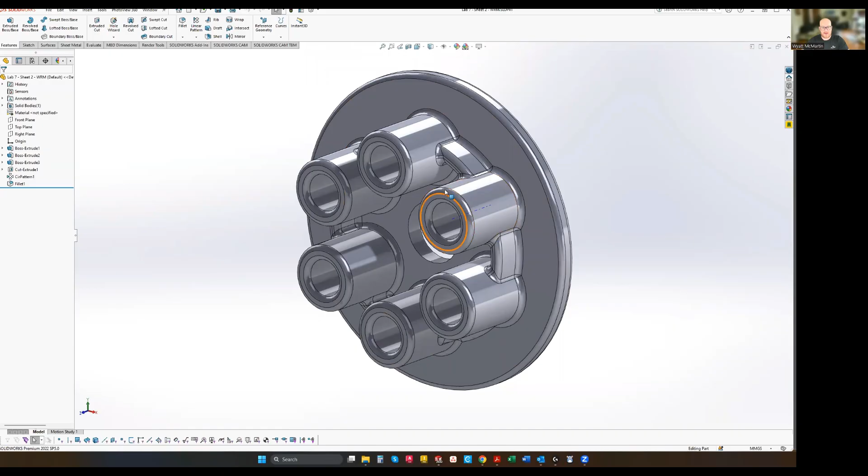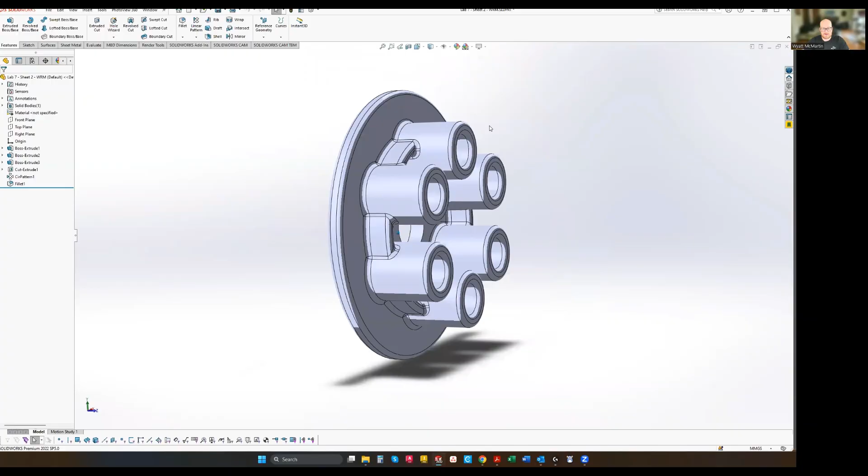This is what we're going to be creating, kind of this caliper type item here. I have this fancy RealView graphics on that makes it look a bit more like real metal, but you can turn that on and off with this button. There are actually a couple options, this gives you some perspective, you can make it look a little cartoony. And then there's ambient occlusion, which you can't really tell unless you have RealView graphics on, and when I turn that on and off it just changes how the light is rendered a little. I'm also going to turn off shadows and perspective.

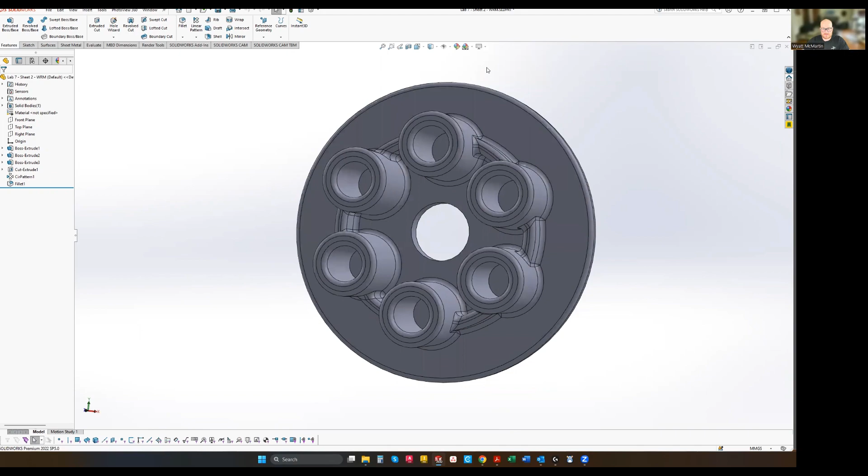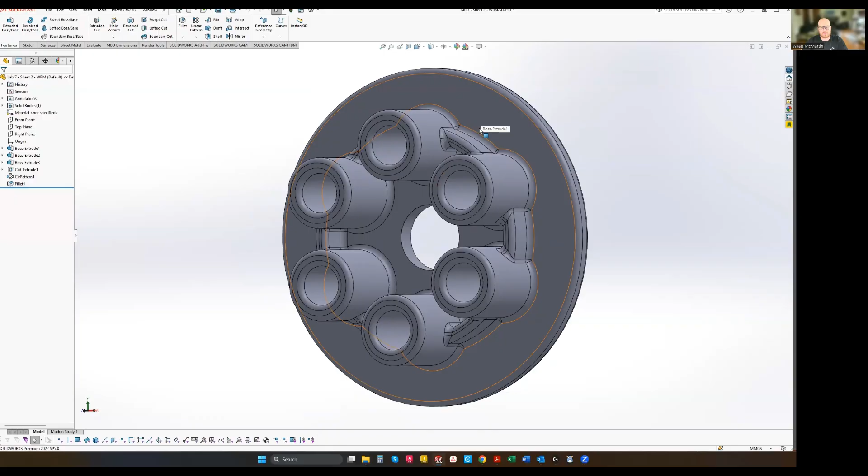So this is what we're going to be creating. A couple new tools here, nothing really for drawing the part itself other than we are going to use an array tool for the first time. But in the drawing, we're going to be using a number of new tools, and these tools are going to be important for Test 2, the first SolidWorks test coming up in a couple of weeks. Let me verify the actual date - Test 2 is going to be on the 25th of this month. So we've got a couple weeks, but remember, I'll remind you that the Lab 7 Sheet 2 lecture video uses a number of tools for the drawing that you're going to need for the second exam. With that, let's go ahead and get started.

First things first, you're going to come into SolidWorks, open up a new part file. The first thing we're going to do here is change the unit system to MMGS, we're going to use millimeters for this drawing, as we can see from your assignment. Then on the front plane, click on the front plane, we're going to do sketch.

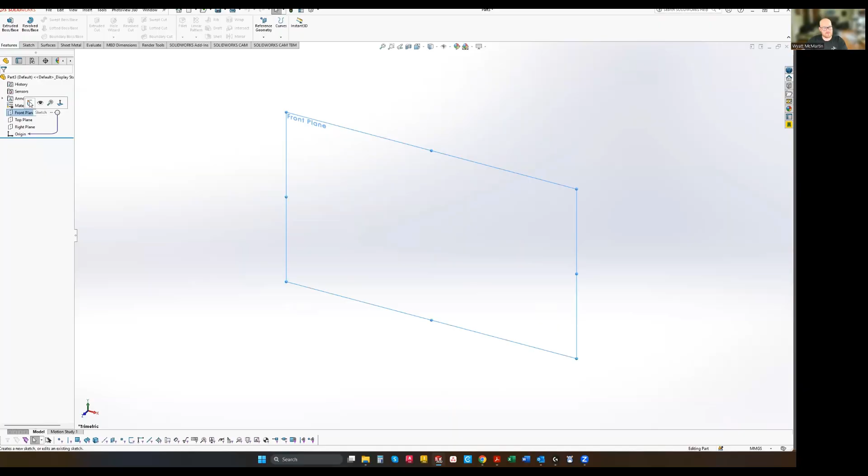I'm not going to show it quote this time, just so you can see what it's like to not have it being shown. Once you open up the sketch, it actually does automatically show it anyways, so it's not when you're actually drawing - when you have it selected, it will go away eventually, but the plane is there for you, so it's not like you're completely blind.

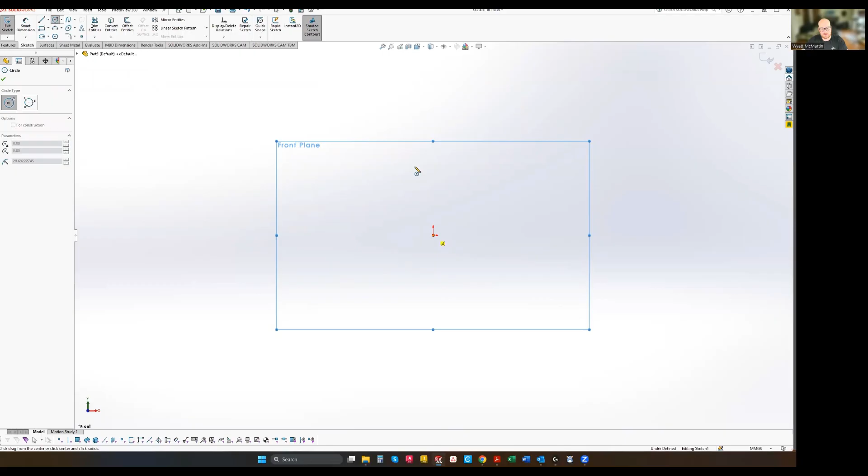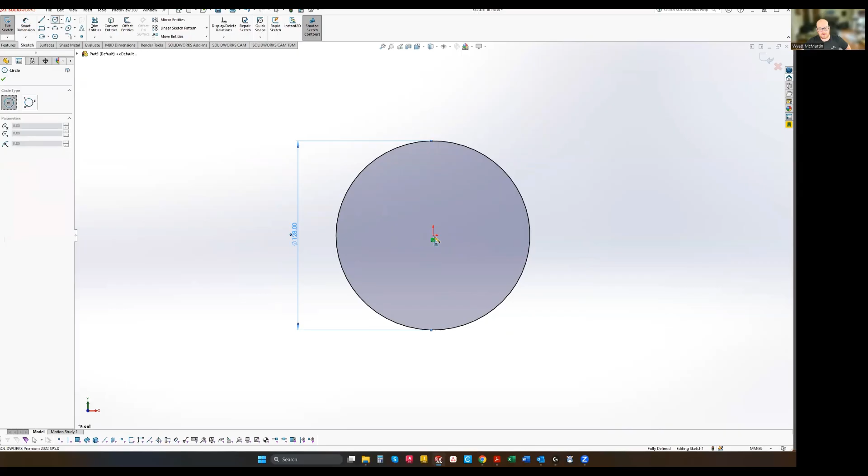Grab your circle tool and on the origin, go ahead and place that. Your plane may disappear, that's okay, and we have our circle. The dimension of that per our reference drawing is 128 millimeters. Then we can see in our reference drawing there's also a through hole right in the middle, and that through hole has a dimension of 25 millimeters. Once you have those dimensions in, you will see both dimensions are black, meaning our part is fully constrained, and we can go ahead and extrude.

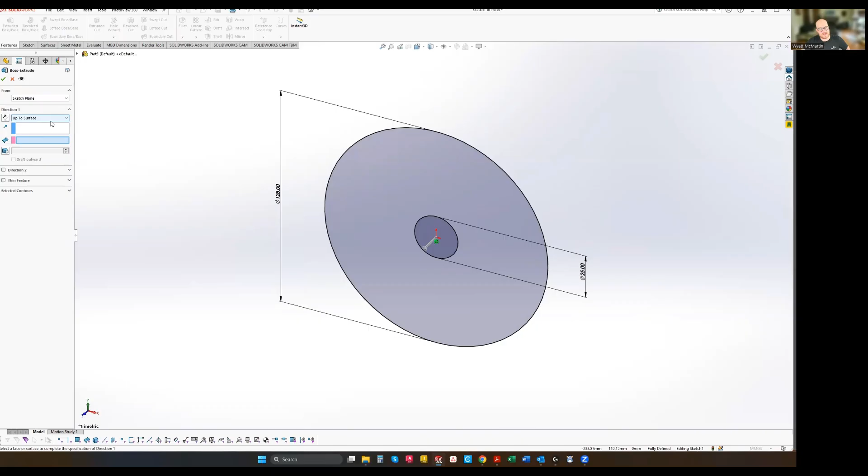For this, I am going to do my mid plane, even though the rest of the part's not going to be centered on the plane. But for this first one, I'm going to do it 7 millimeters from the mid plane. Click the green check mark.

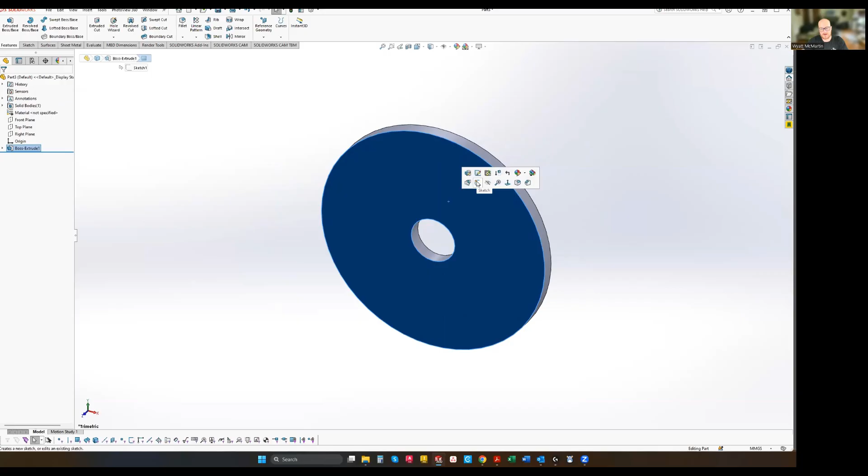Then we're going to open up a new sketch on this face. Click on this face, new sketch, and it's going to bring you normal to this face. I'm going to grab my circle tool, and starting on the origin, drag a circle out to this area here, and I'm going to dimension that out to 85 millimeter diameter.

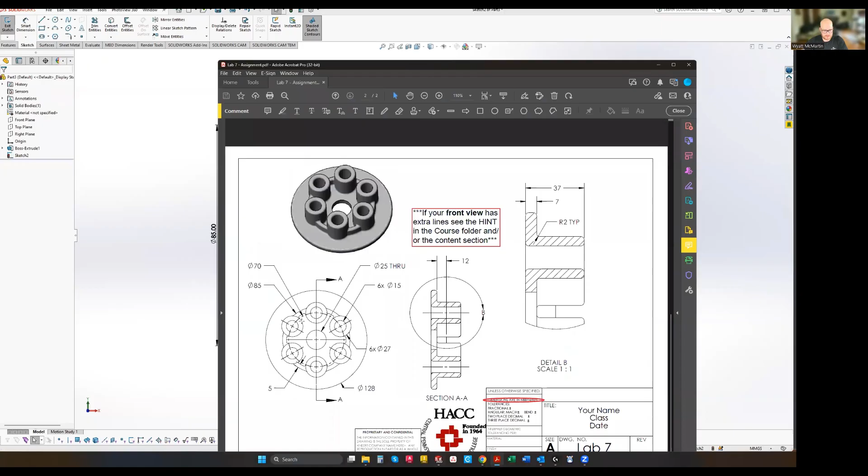Now what we're actually drawing here is this ring right here. So we don't have an arrow that's pointing to the inside of this ring. We don't really know the thickness—well, we have a thickness given to us here, but we don't have a diameter for the inside.

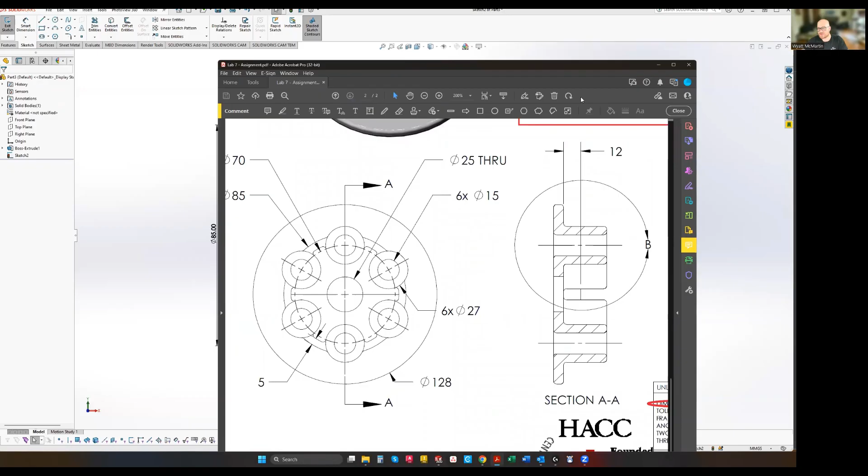So how we do that, just like in AutoCAD, SOLIDWORKS has an offset tool. So we can click on this circle, offset, and it's offset at 5 millimeters. But see, we're on the outside, so we're going to click reverse. That's going to bring our offset to the inside, green check mark.

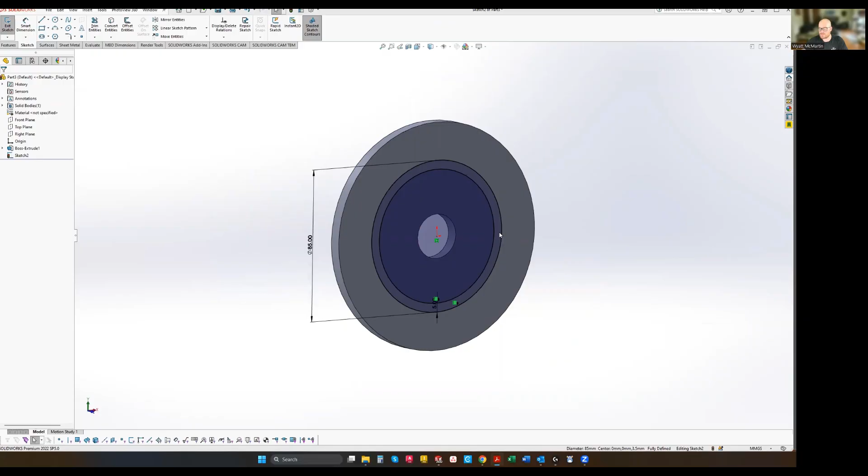And we can go ahead and extrude that. Let me zoom out so I can see my reference here off screen. And we're going to go ahead and extrude that.

Now this time, just like previously when we're drawing on a face, we already have material, we're just going to go blind. At least in this case we're going to go blind, and we are going to extrude that out 30 millimeters. Click the green check mark.

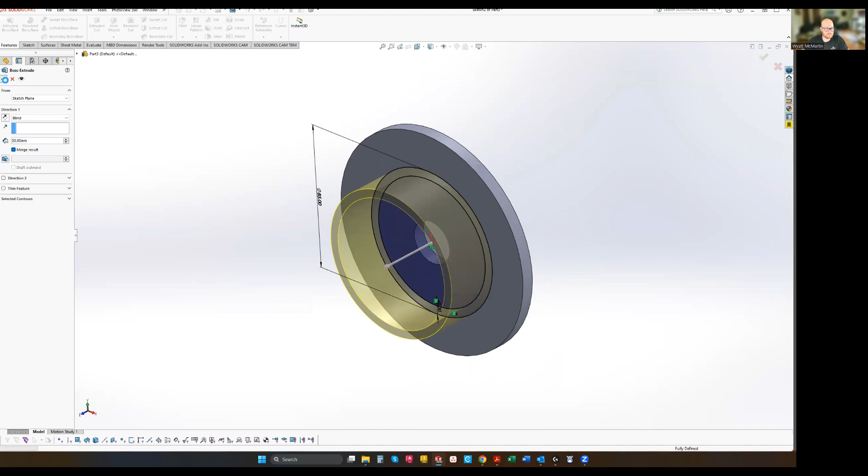And from here, Control-1 will bring you back to the front view. And again, let's go ahead and click on this face. This face and this face are both the same, they're just separated now by this rib. So either one of these is going to work just fine.

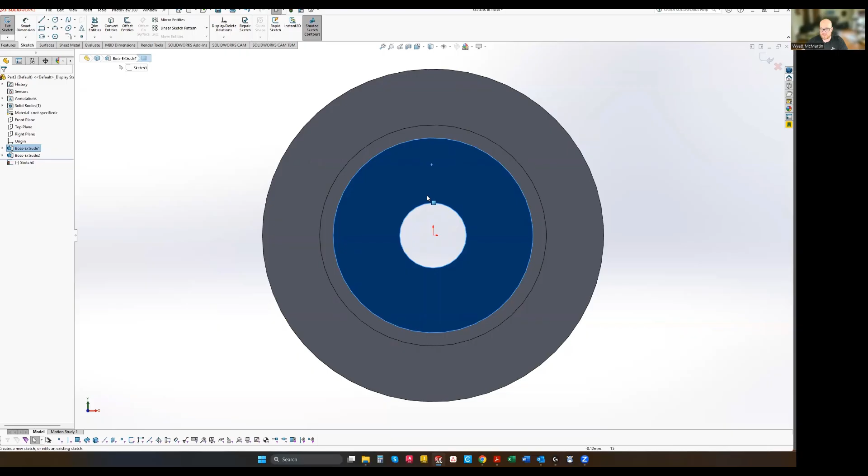Click Sketch. Now we're inside a sketch on this face, and we're going to grab another circle from the origin. Before we dimension it, let's go ahead and click on it, highlight it. Then in your properties window, go ahead and click that check mark, and now you'll see it is for construction.

Now go ahead and grab your smart dimension, and this per our reference is going to be 70 millimeters. And what that is, since it's for construction, it actually is in this case the center line for all of these little extrusions here.

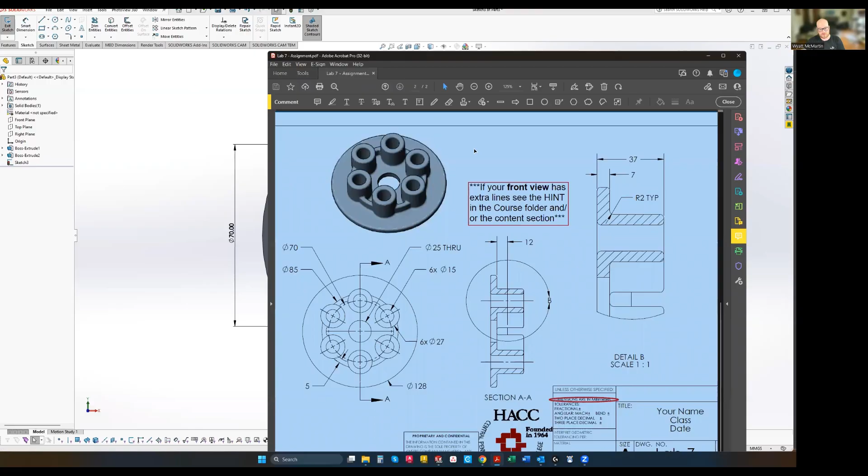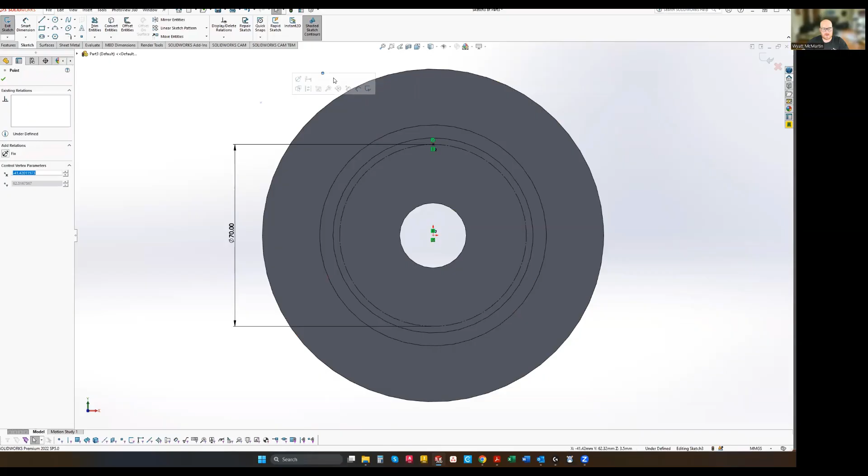So knowing that, let's take a point. You don't necessarily need a point, but I like to put one in, and you're just going to snap it right to the top of that circle, and it should automatically give a coincident mate and a vertical mate to this origin. So right now this point is vertical to the origin, which means it cannot move left or right, and it's also coincident to the top of this circle. So that point is fixed in space and it's black. If you just put one way out here, you'll see even a point can be blue or black—so this point is constrained.

And we're going to grab our circle tool, and we are going to dimension that circle as the larger, the outside circle. So that's going to be 27 millimeters, just like that. And now we can go to features, extrude, and that will also be 30 millimeters.

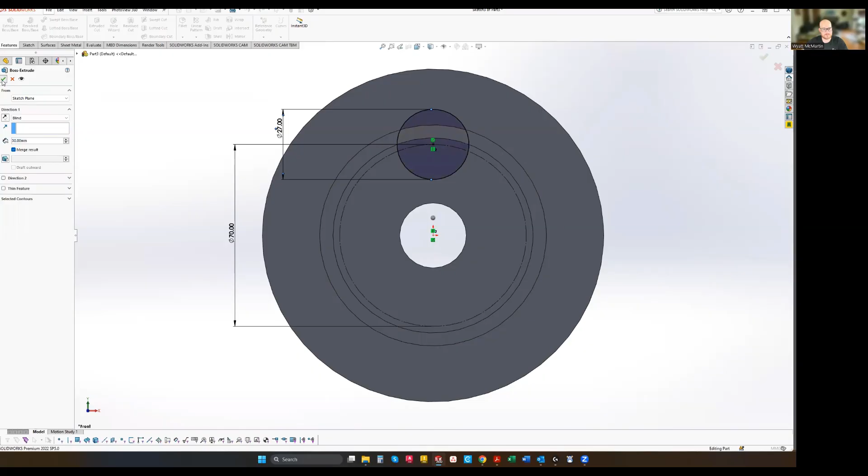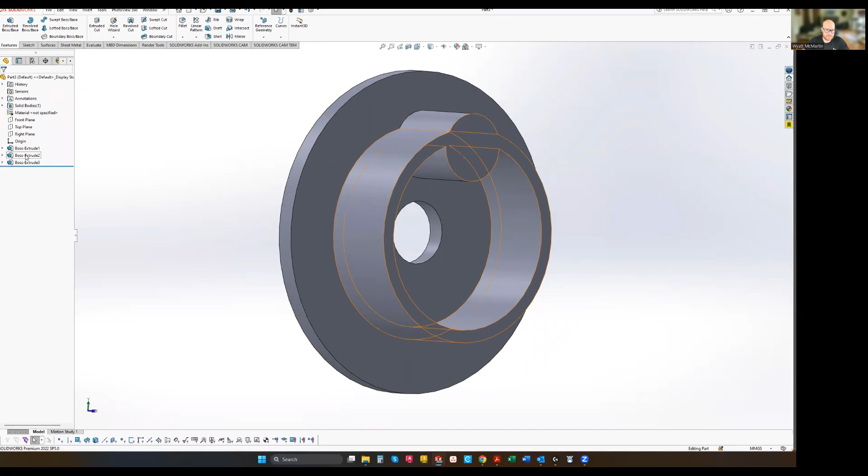However, there has been a mistake. This rib right here should actually, looking at our drawing, only be 12 millimeters tall from that top face there. So to fix that we have to edit our extrude. I can come back, click this extrude, edit that feature, and it's just as easy as changing this dimension that we put in. So we're going to make that 12, click the green check mark, and there we have it.

Next step here: open up a sketch on this top face right here. Good drafting practice—I would probably actually open this on this, but I kind of want to show you, you can draw really anywhere. You can't draw on a curved face, you'd have to project to that, which we're not going to cover in this class.

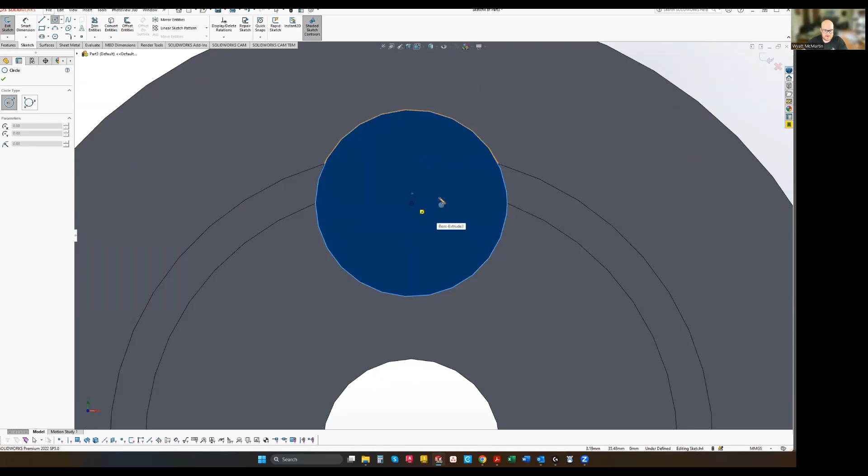However, we are able to draw on this face, so I'm going to go ahead and create a circle. Now if you hover over the edge it should allow—yep, there we go. You might have to kind of hover and then come towards the center, and it will give you an option to snap. See, there's that little yellow icon. So when that icon is active, that means you're going to snap to the middle.

And go ahead and dimension that to 15 per our PDF assignment reference drawing—15 millimeters. And we're going to take that, go to features, extrude cut.

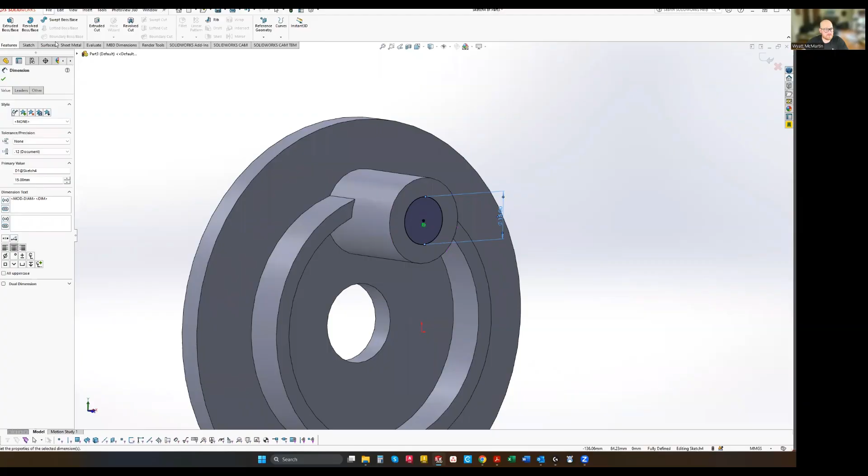Instead of going blind, we know the dimension, but we're going to use a different tool. So we're going to use Up To Surface. And then this face or this face would work because they're coplanar.

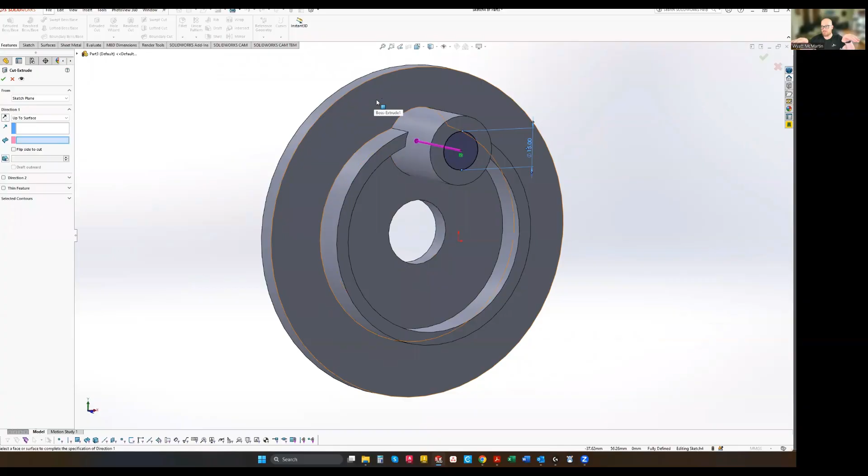That means they're on the same plane. We'll just go ahead and click here. We can see our preview is going to make that cut go right up so it's even with that face. Click OK. And there we have it. Now we've cut through our rib successfully.

Now we're going to use our array tool for the first time. Hold Control, click this Boss Extrude, then click this Cut Extrude. We'll come underneath linear pattern, do the drop down, and do a circular pattern. In AutoCAD, this would be a polar array.

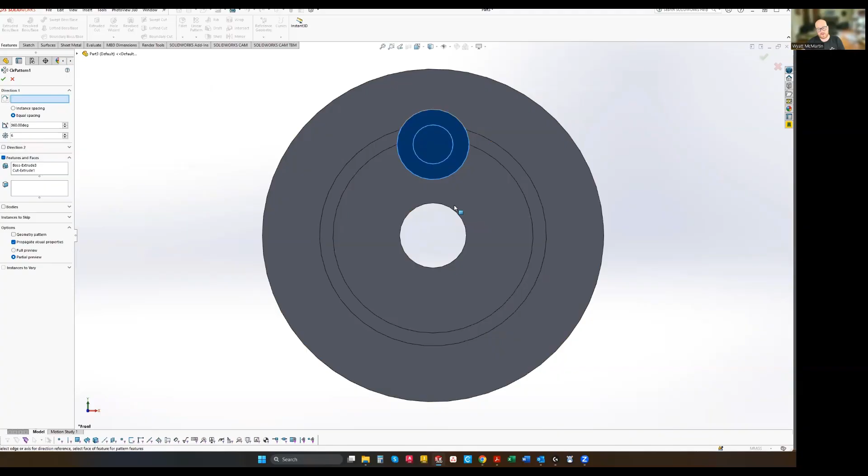Once we're in here, it's going to ask us the direction. We'll go ahead and click any of these arcs that follow this same point. This would work, this would work. I'm just going to go here like that. I already have 6. Yours may look like this, or it may look like something like this.

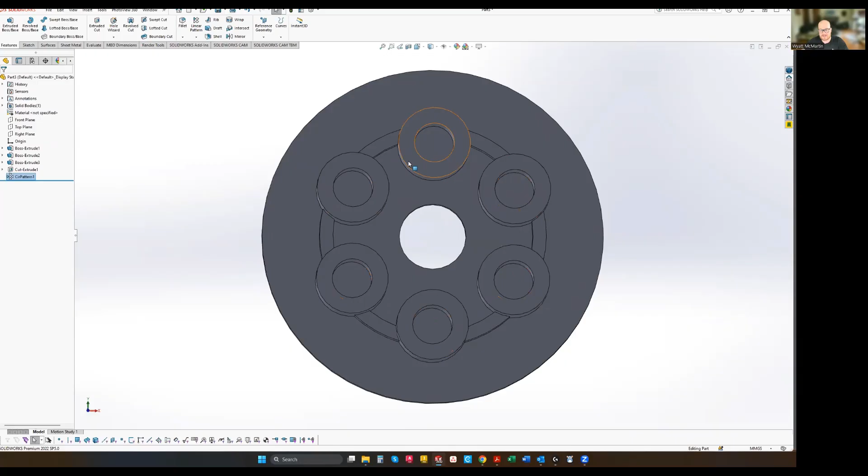Just change the number of instances to 6 and click the green check mark. You can see we have patterned the features. We didn't pattern a sketch, though you can also pattern the sketch, but we've patterned these features so that this rib has been cut every single place that this extrusion and cut occurs from our circular pattern.

We're almost done. At this point we just have to add some fillets. You can do multiple fillets if that makes more sense to you, or you can do what I'm about to do, and put them all in one feature. Sometimes it makes sense to split things out, sometimes it doesn't. For our purpose, I'll show you that you can have all of these fillets in the same feature.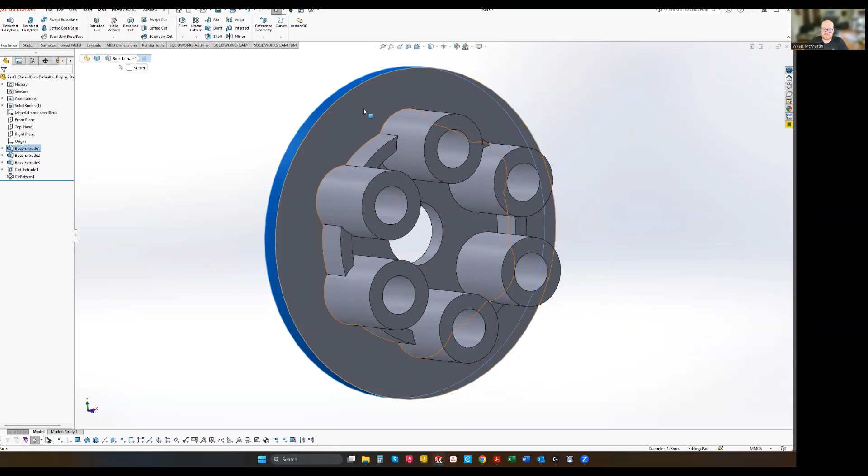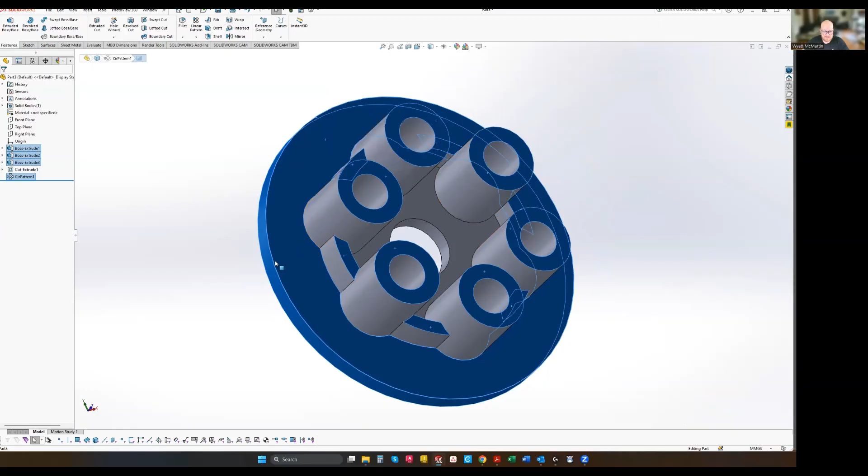I'm going to hold Control and select around. The tops of these all need to be selected. We want all of these filleted, but not either the top or bottom. See, I have this face selected, so all of this on the outside is going to get the fillet. And this face is selected, so the top and bottom here, but we're not selecting this face, because if we do, the bottom of this hole is going to have a fillet, and we don't want that.

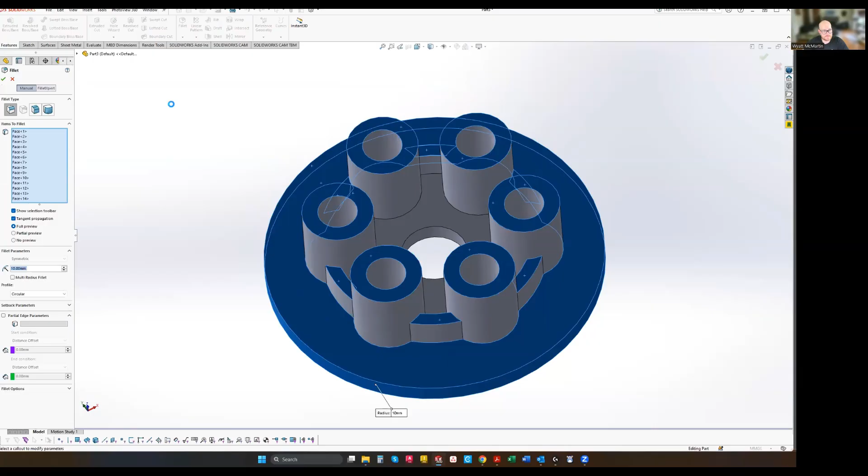From here, I'm going to go ahead and click fillet. The radius of that fillet is going to be 2. And now it's giving us a nice preview.

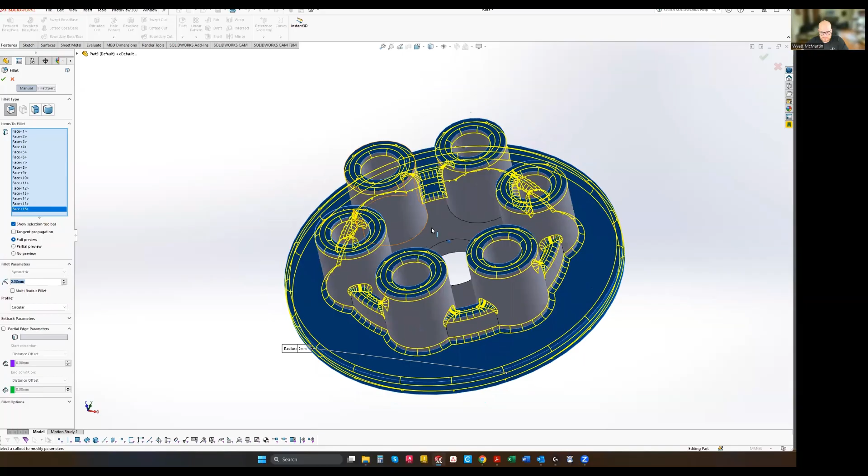We can see there's a few little items that are not selected that we want to be selected. I'm going to click that face, and I'm going to click that face. I know it does get a little dicey in here. Oh, and we want to select tangent propagation. There we go, just like that.

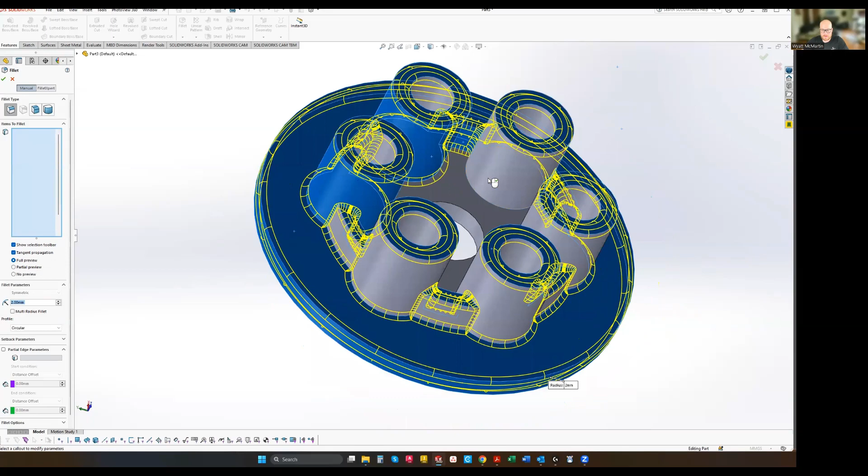Now we have almost everything done. To get the bottom of these pillars, I'm just going to select the pillar. There's different ways, you don't have to select exactly the way I'm selecting, but basically everything is getting this fillet, every single connection point on this entire model, except for the top and bottom here, but everything else is getting it.

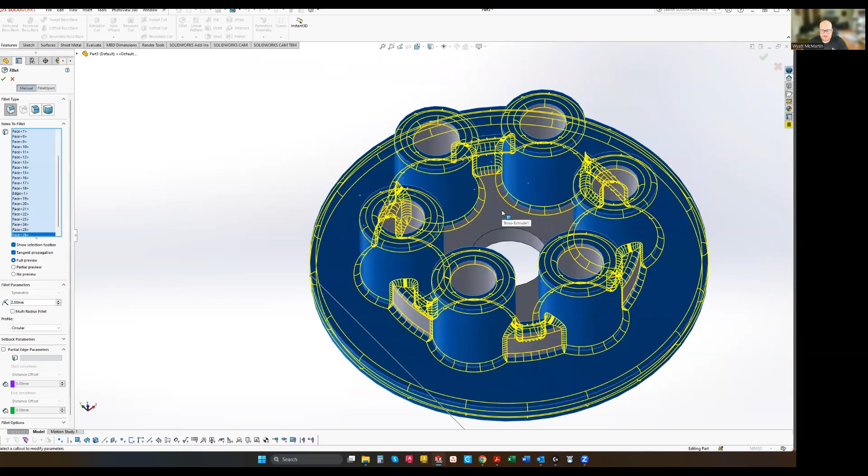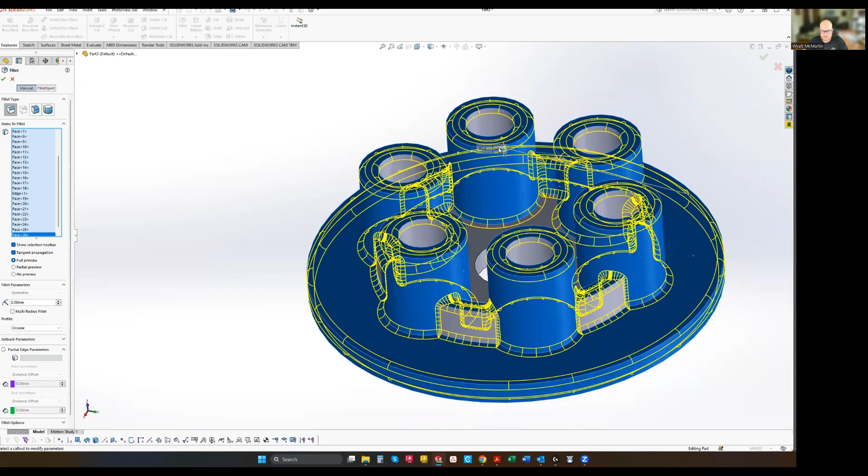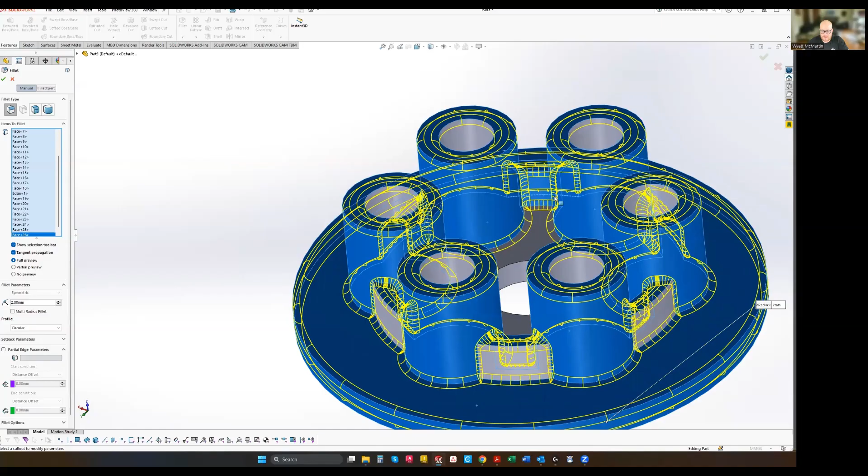I know this is hard to look at, but instead of looking directly at it, I kind of look with a 1,000-yard stare, looking in this direction, using my peripheral vision, not just at one individual line, but at this whole area. I can look through the preview and really see more. It's like seeing the forest through the trees. This one line would be a tree, but this whole preview is like a big forest, and I'm kind of looking at all of it at the same time by looking more through it than at it.

You can make sure that everything is selected. It looks like everything is, and we'll go ahead and click the green check mark.

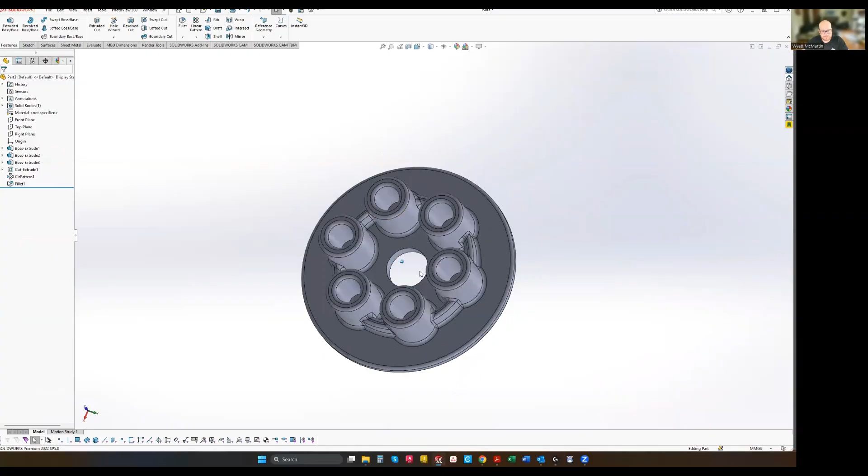There we go, so now everything has the fillet that needs to have it, and we only have one fillet feature in our feature tree here. The only things that don't have the fillet are this top and this bottom.

And with that, we have completed the modeling portion of Lab 7 Sheet 2.

So before we go ahead and plot this, give me a Control 1, which is going to bring you to the front view, and then click the up arrow 2 times. So Control 1, up arrow 1, 2, just like that, and then click the space bar to bring up the orientation menu.

And we're going to add a new view, a custom view to this, and it's going to make sense here. So we're going to click that. Our custom view is going to be called custom ISO, like a custom isometric view.

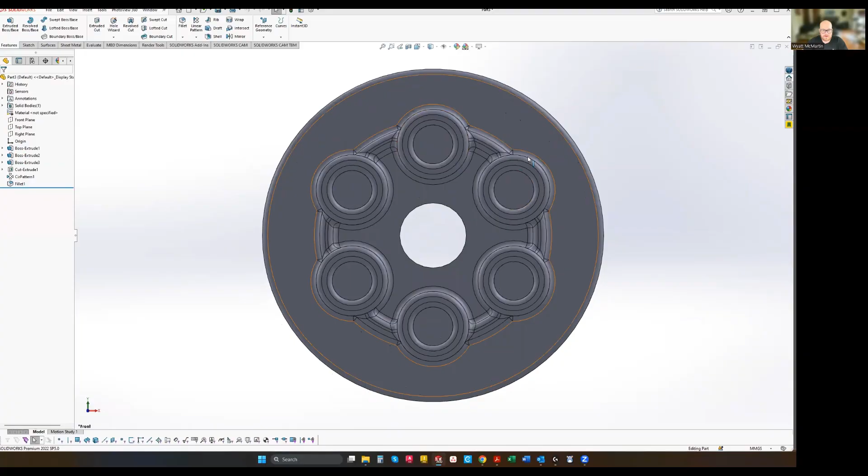There we go, so now we have it. So now we have our front view here. If I click the space bar to bring up this orientation menu, now I have my normal ISO here, but I also have my custom ISO. So I can just zoom to this view anytime. And this view will also be available to us in our drawing, which is why we did that.

So go ahead and save it. You should be saving it to your submissions folder. I'm going to go ahead and save it. Yes, I already have a drawing called this, I know.

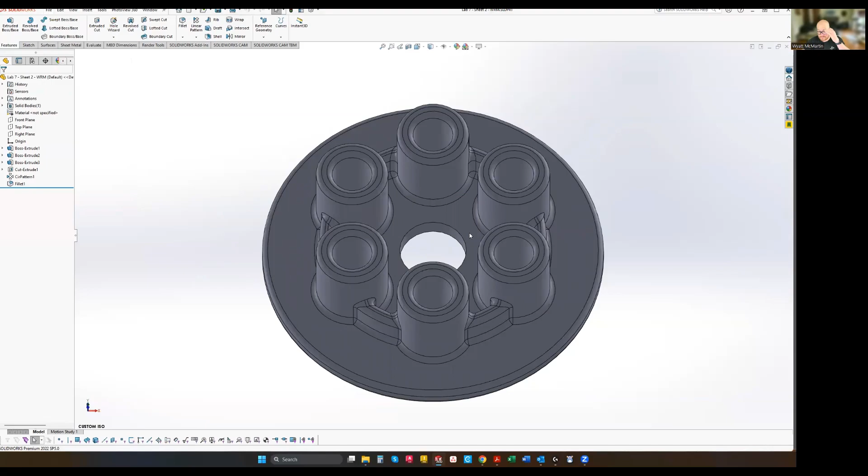Once this changes up here, you know it's been saved, and then we can file, make drawing from part. CAD 154 title block.

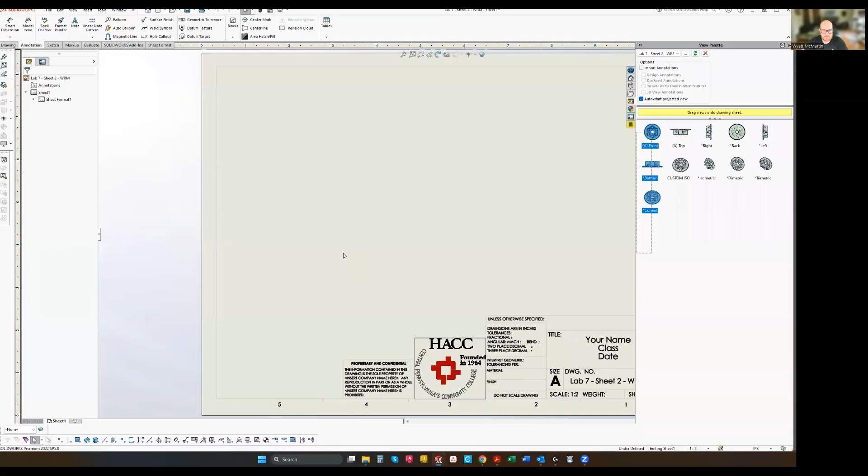And here we go, so let's click and drag in our front view. Oops, click on and then drag in, and place that kind of in this region, somewhere in here.

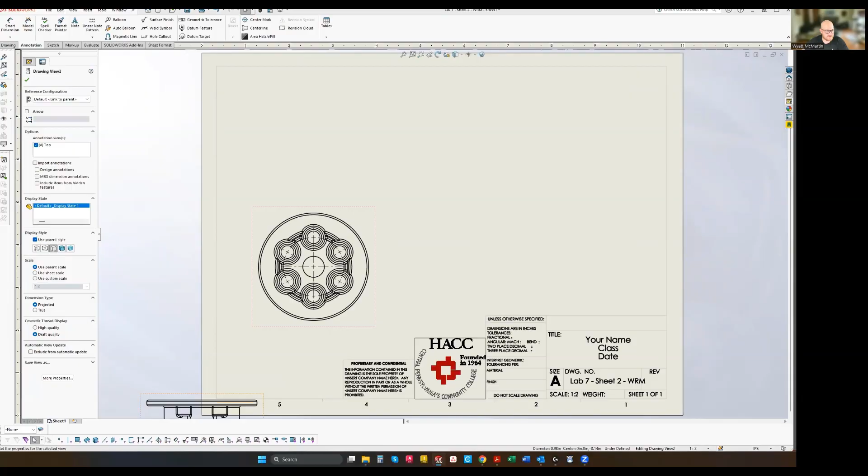Now you have all these extra lines. So what you can do is select the view, right click. Oops, sorry, gotta click escape, it's trying to give me projections. If you put one in on accident, just go ahead and click delete, click it and then delete it. So this is selected now.

I can right click, and under tangent edge, let's make tangent edges removed. So that was just showing us the exact point where it becomes tangent, and it's kind of distracting.

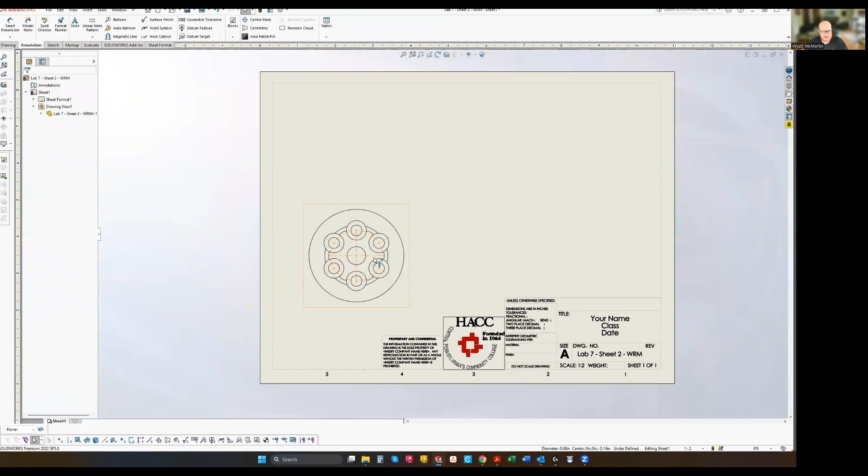So another thing that I want to show you how to get rid of is, oops, come on. There we go. You don't have to do this, but some people's might not come in with this nice center mark across everything.

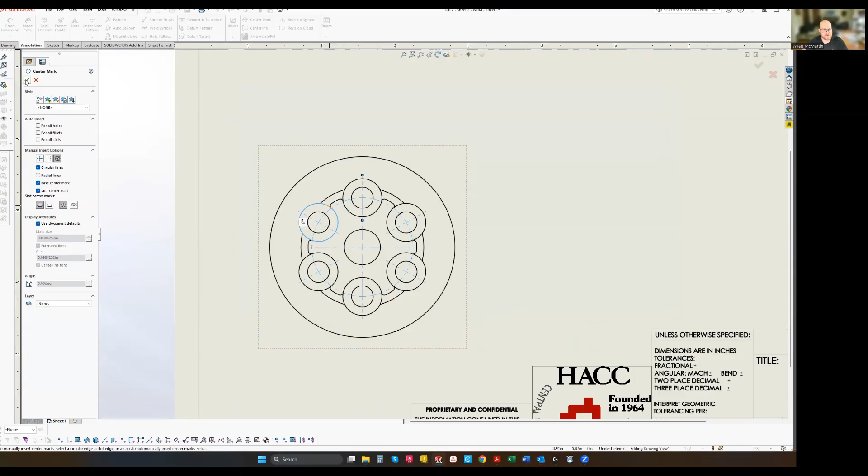So to get that back, or if you accidentally delete it, you can click center mark up here. That'll bring up this menu. And then you can select this circle, kind of like exactly what we have. It's called a circular center mark or radial center mark. And then you can come in and just click all of these, the outer circle, like the larger circle here. And there we go, that's how you get that back in case you don't have it or in case you delete it on accident.

Now from here, we will not be doing projected views. We are going to do, one is going to be the custom ISO. So let's go to drawing tab, model view,

and double click on your part, if that's open. I don't think I talked about that already yet, but when you go to insert these views, if you don't have the part open already, you're going to have to click the browse button. So when you do model view up here, if I already have the part open, it's just in this window, it's open documents. If you don't have it open, you're going to have to click browse, and then you browse to the location where you have your part, just like that.

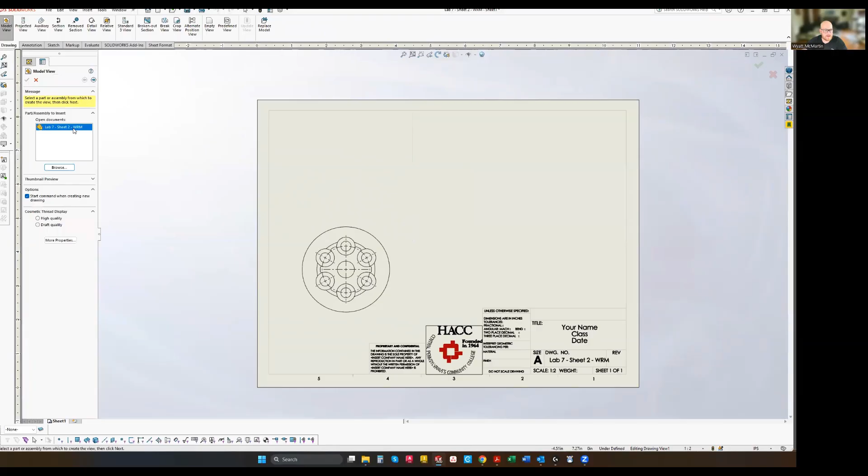So I have it open, so I can just go ahead and click. My custom ISO is an option, so I'm going to do that. There we go, drop that bad boy right in.

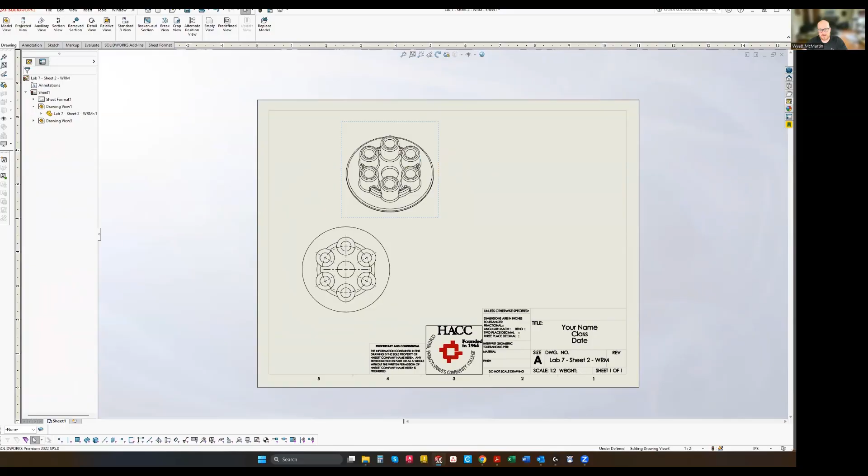Click escape so it's not trying to give you projected views. And then I'm going to click on that, and we're going to make that shaded without edges. And then this little button, this real view graphics, let's turn that on so it gives it a little bit more perspective, just like that.

Now we're going to do what's called a section cut, and we're also going to do a detail view. So the section view, this is what you're really going to need. These three things: the isometric view, the shaded isometric view, the section view, and the detail view are going to be important for exam 2.

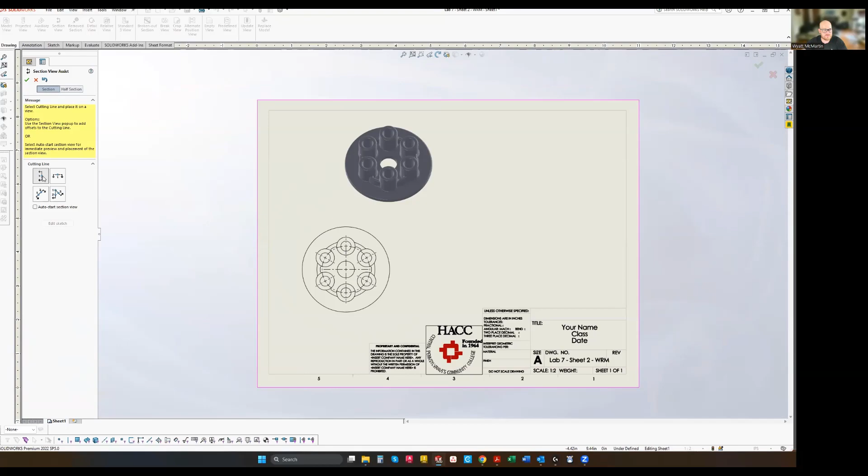So click on section view. We want a vertical cut. We're going to go ahead and click that location, click the green check mark, and then we can pull this out to the side here and go ahead and click to place.

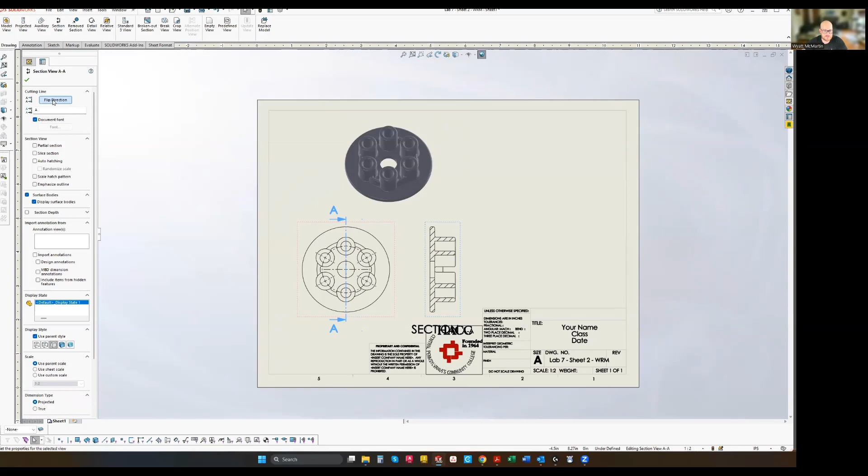I'm going to click escape a couple times. You may notice a couple things, the first being that this is facing the wrong direction. So go ahead and click on it. That will bring back up the section view indicator or menu here. Just click flip direction, and there you have it.

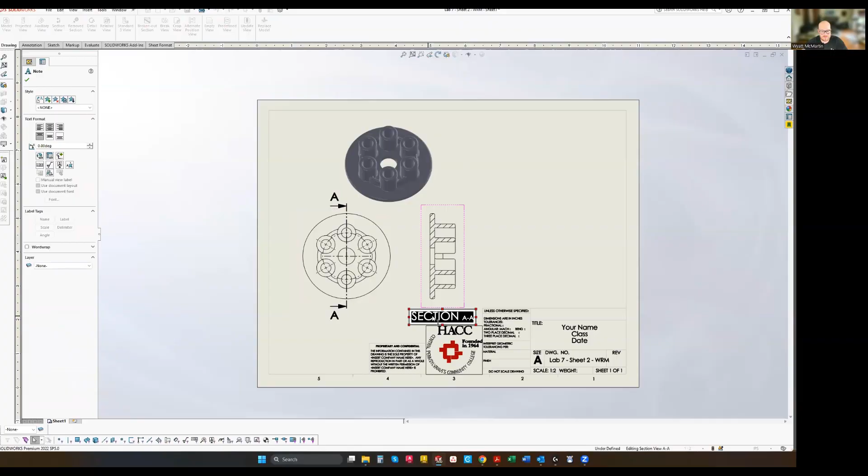Now we kind of want to bring this up a little bit because this text was overlapping our title block. It always comes in like this for some reason, so I double click to edit the text. It's all highlighted, and I'm just going to make it 12-point font, all of it, just like that. And I like to bring mine up just a little bit.

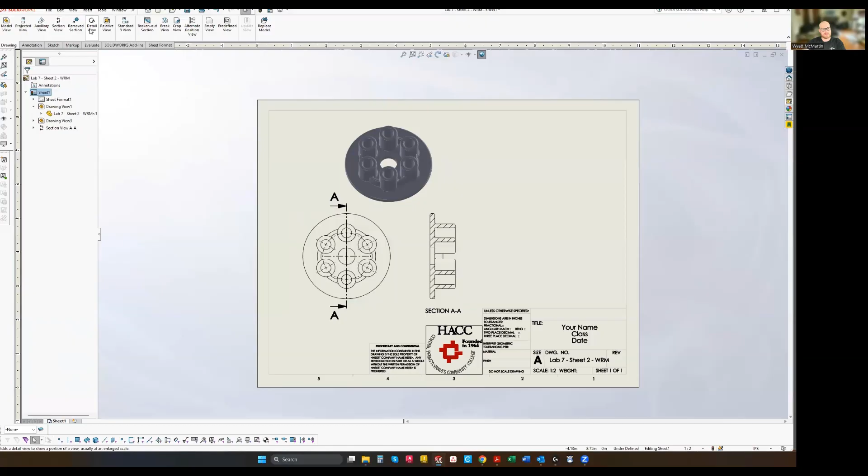Now, the next thing before we throw dimensions on, or the last view we need to put in, is a detail view. A detail view would be when you want to kind of blow something up to show more information than maybe you can get on there, maybe to throw some dimensions in like a really small little area.

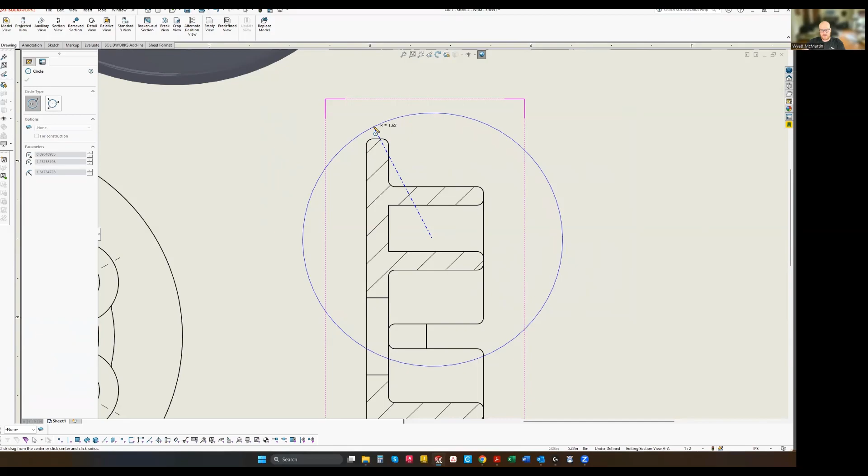So grab your detail view. It's gonna basically give you a circle tool. So I put my circle kind of arbitrarily, right in the middle, and I drag it up to this location. Click again, and now it gives you this really big view that we can place right over here.

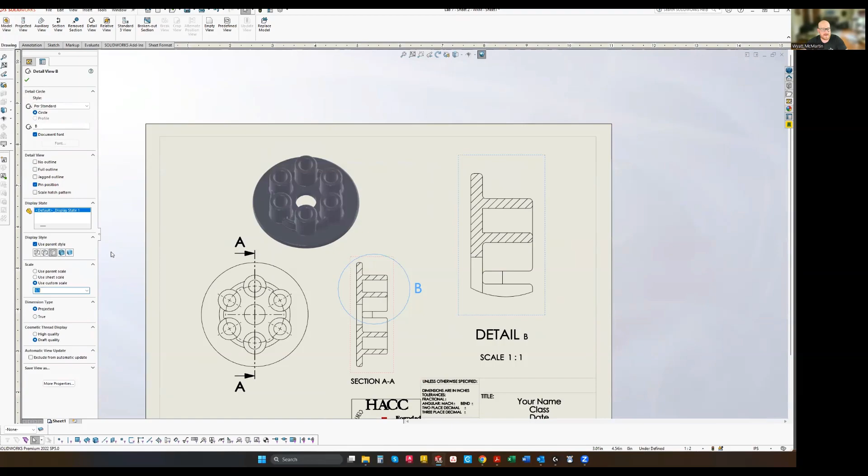You can change the scale of that, make it bigger or smaller. You do like a 1:5. You can do a 1:1. Or you can do a custom and make it really big. You can make it like 5:1, or anything you want. So 1:1 works fine here for us.

The rest of this is 1:2, and it should automatically just bring that in. It should choose your sheet scale based on the size of the model, generally speaking, that's why we haven't really talked about that. But anyways, go into double click the detail B, scale 1:1, and you're going to take this and just give this a 12-point font also.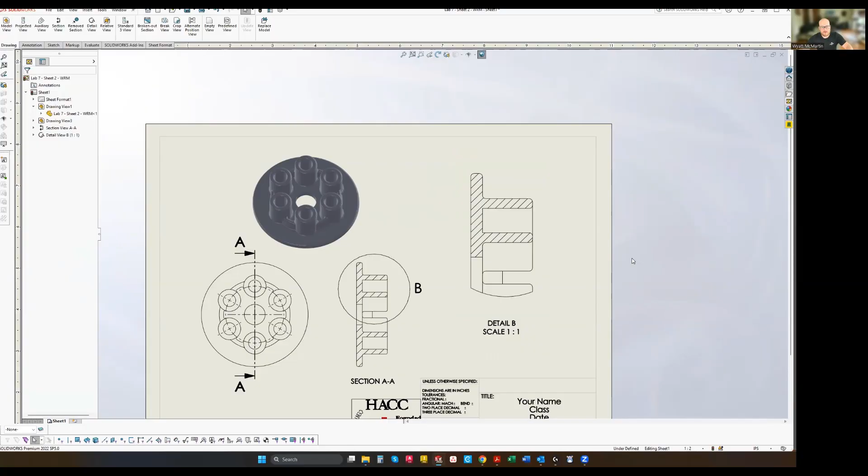And actually, I'm going to go back in there and delete that space. And there we go. So at this point, all we really have to do is throw dimensions on.

And we are going to have to change a few things in the little dimension scheme area. Double click the middle mouse will recenter. I know I've said that at least once, but I want to say it again. It works in the drawings too, it doesn't just work in the model. So we're going to come up to the options window.

And document properties, dimensions, primary precision, because we're in millimeters, is going to be none. We're going to need diameter dimensions, those are going to be broken leader horizontal text. Radius dimensions are going to be broken leader horizontal text.

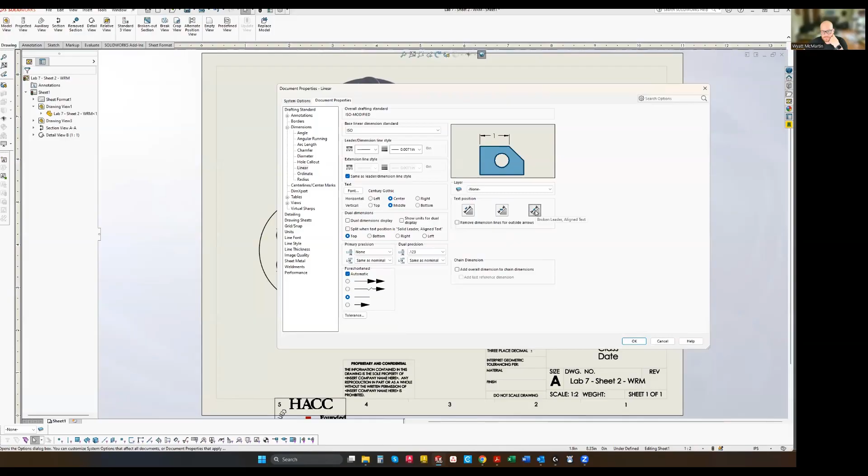And linears are going to be this guy too, that works. Or we can do that. How about that? Okay, and last thing here.

So we have, even though our part is in millimeters, we actually have to change this on our drawing too. So we're going to go change that to millimeters.

And from here, we could just throw some dimensions on. So I'm going to follow our sheet. So because this is like a broken circle here, because there's these cuts, it's going to show as a radius. So we're just going to take that and make it a diameter.

So you can click on it, you should be able to click on it or just right click on it. And you could display it as a diameter or display it as a radius. Another smart dimension, this guy. Just like that, same thing, make it a diameter.

There's that. And then we want to add some text, just like that over here in the dimension text area. We're going to add some text here too. This is going to be 6x space, and the x's can be small. I usually do small font for that kind of thing. And we need this guy.

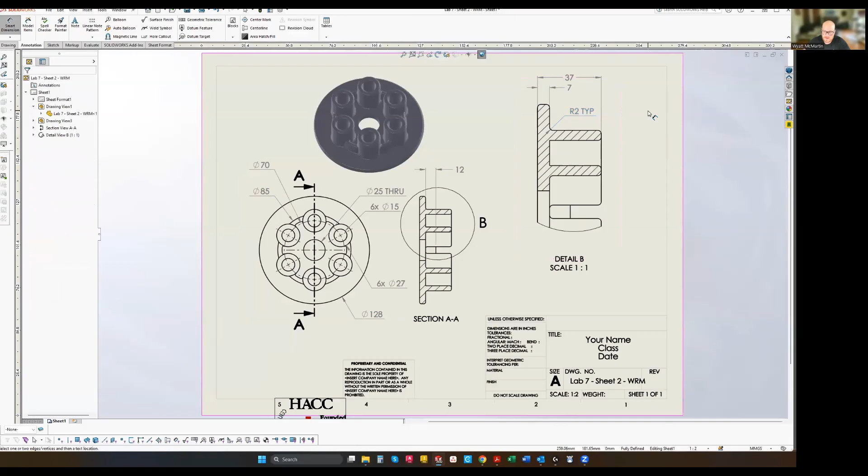And that looks good. So the only thing left we have to do is let's grab a center line. And we're going to go here and here. Oopsies. Added it to the wrong location. So I'm going to go here and here, just like that. There we go. And then delete that. Cool.

This added it for me on accident because I selected the wrong thing. So you will likely have to add both of them, but it's the same process. You just select the top and the bottom right here on both sides. And that'll give you a nice center line.

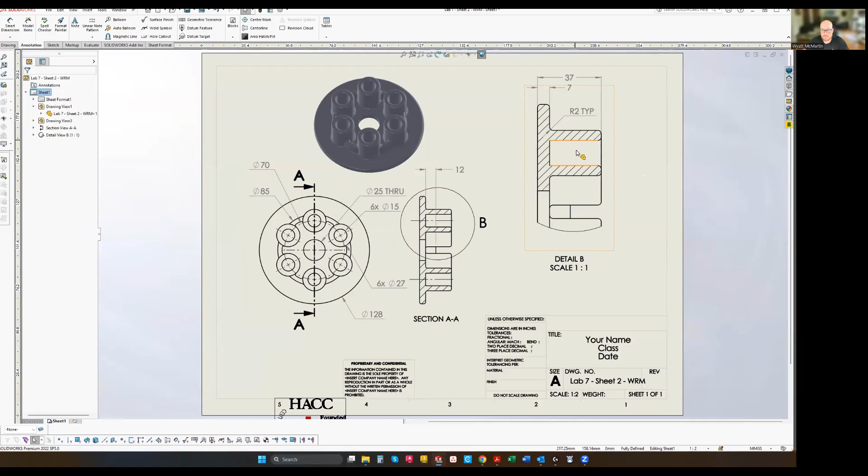And I just realized that I totally messed up our model. So let's go ahead and save this. It's going to be a quick change. I just want to save this drawing so that we don't get bitten later, you know, in case SOLIDWORKS crashes. And you should already have this part open, but if not, you can right click on any of these views and click open part.

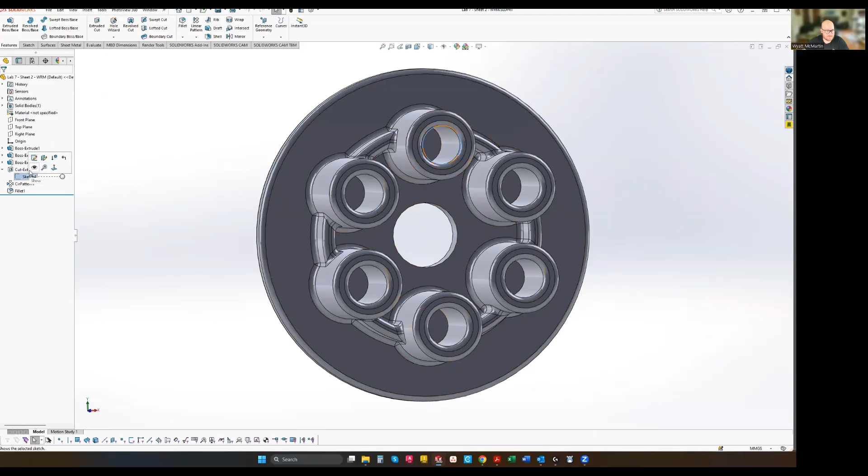Now, these were supposed to cut all the way through. So there should be, because these are bolt holes. So this cut right here, this is the cool thing about doing one cut and then doing an array or a pattern, is all we have to do is this face that we used. Let's just make that this face right there.

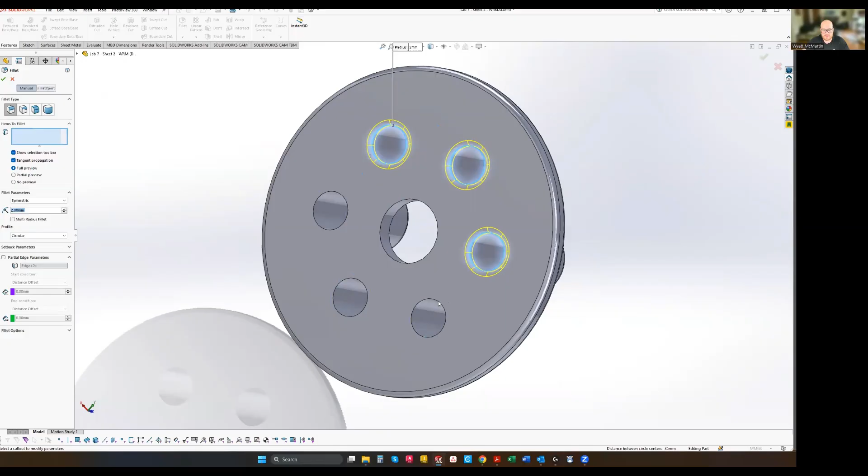Click OK. Boom. Now that mirror is all the way through. And then you can either edit the fillet that we already have, but for simplicity's sake, I'm just going to go ahead and make a new fillet. So I'm going to open up my fillet tool. And then with that open, just come through and I can click just like that. Click the green check mark. And there we go.

So I'm going to close this. You don't have to. You can just go back to your drawing. So I'm just going to close the part. You don't need it anymore. And now we are all the way updated. So the only thing, because we changed this feature, now this dimension is kind of screwed up.

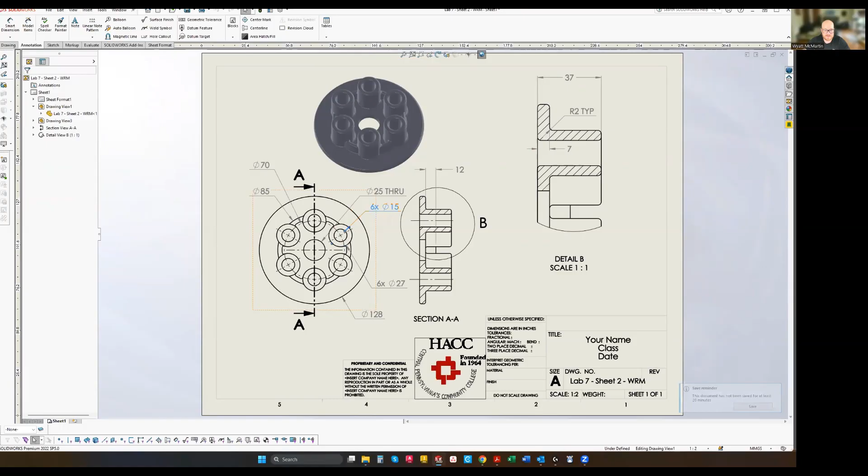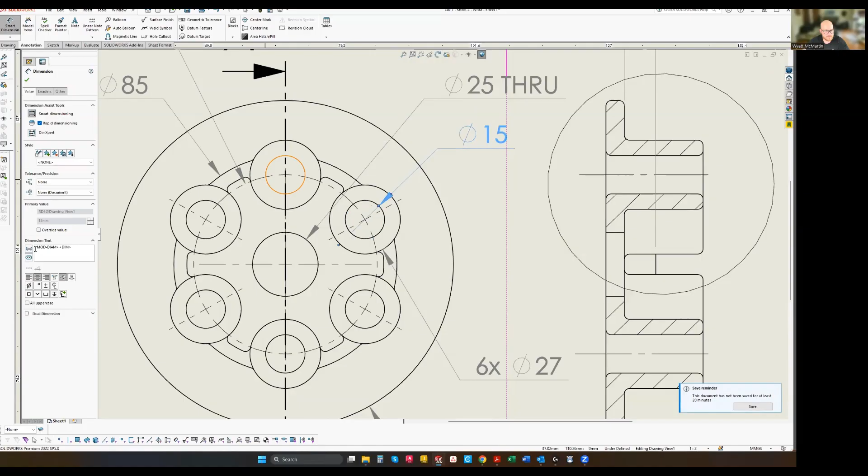So you can just adjust these little guys. But it might be kind of difficult to do it that way. So just delete that dimension is probably the easiest way to do it. And do something like that. And then go ahead and just edit this text again.

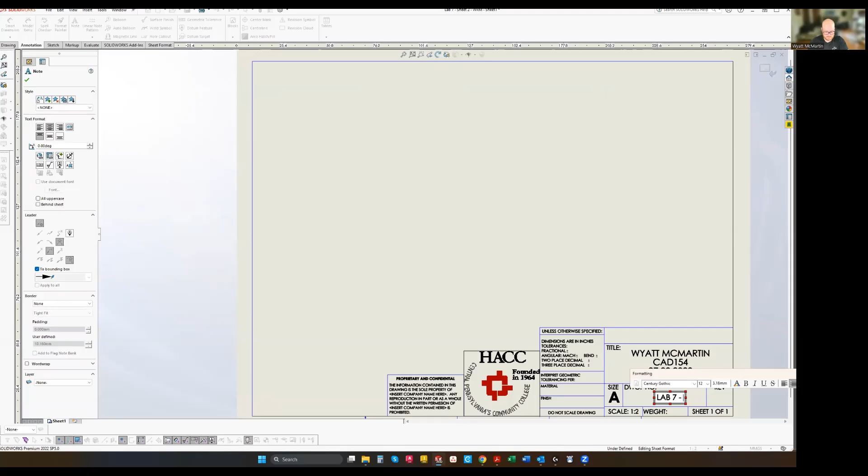We are going to have to edit our sheet format. So right click, edit sheet format. Make that look good. Change this to our lab 7 sheet 2. And click the button to get out of here.

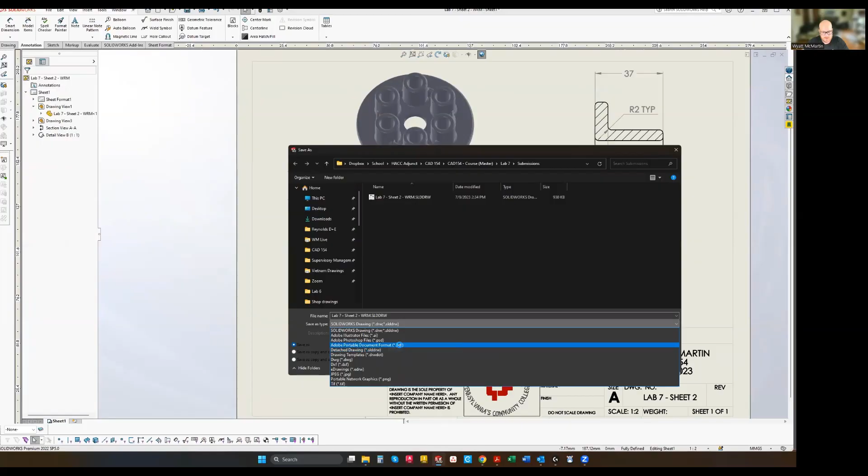Boom, this is back. And we can save as a PDF. Now, the PDF you plot from this, again, is going to be what you submit to the Dropbox. Let's go PDF, save. And there it is.